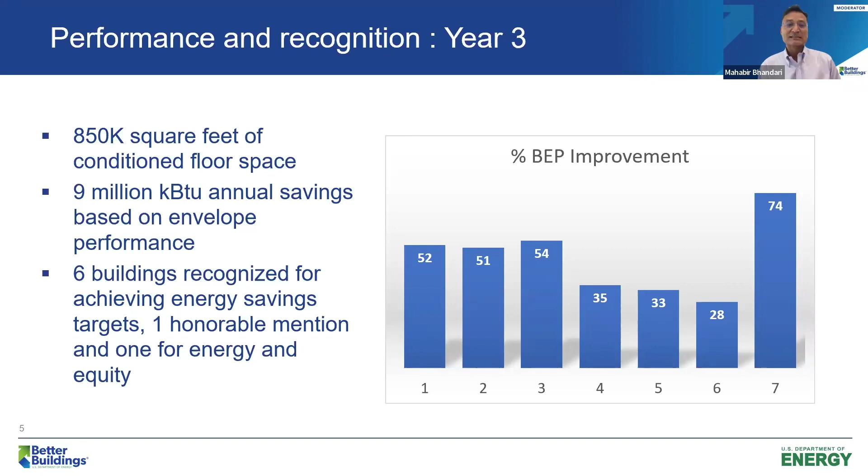So here are our award winners today. If you look at the building envelope performance, what we call BEP - and some of you, if you haven't heard about BEP, we had already a few presentations on how we were calculating it - these are our different improvements from baseline to different categories. The first one, for example, retro honorable, were very close to 30% savings. We had award categories: in retrofit buildings, 30% savings gets you a retro honorable. They were novel 40, and we have all the way up to novel 50. One of the buildings was 70% more improvement than the base - it's a new building, so at the base code at that time.

So we'll show now some of the awardees. Please enjoy the videos and slideshow.

Hello, my name is Anas Al-Qassas, founder and CEO of Inovues. I'm here to present Creekside 5, a non-invasive facade retrofit project we did recently in Portland, Oregon, where we transformed the first floor double-glazed windows into high-performing triple-glazed without removal or replacement. First, I'd like to thank the DOE Building Envelope Campaign and Oak Ridge National Laboratory team for the recognition. This project was a demonstration of our patented insulating glass retrofit technology and exterior secondary windows, done in collaboration with Capital Land and the Northwest Energy Efficiency Alliance (NEEA), who sponsored a full measurement and verification study as part of their field test program for commercial secondary windows.

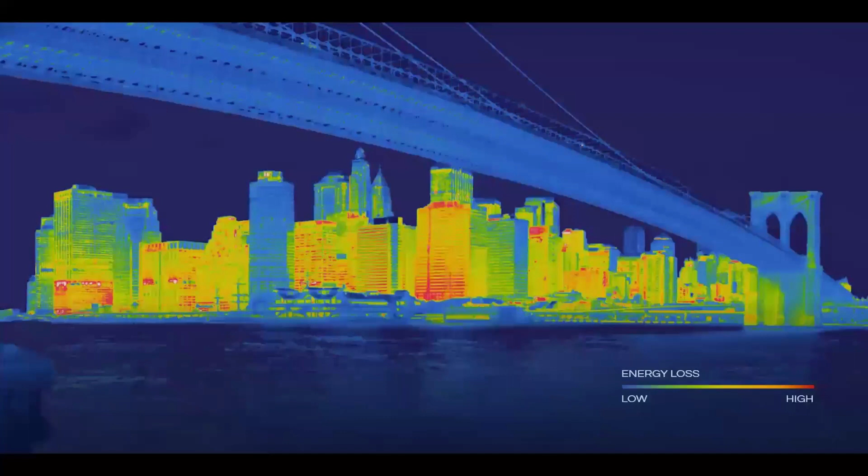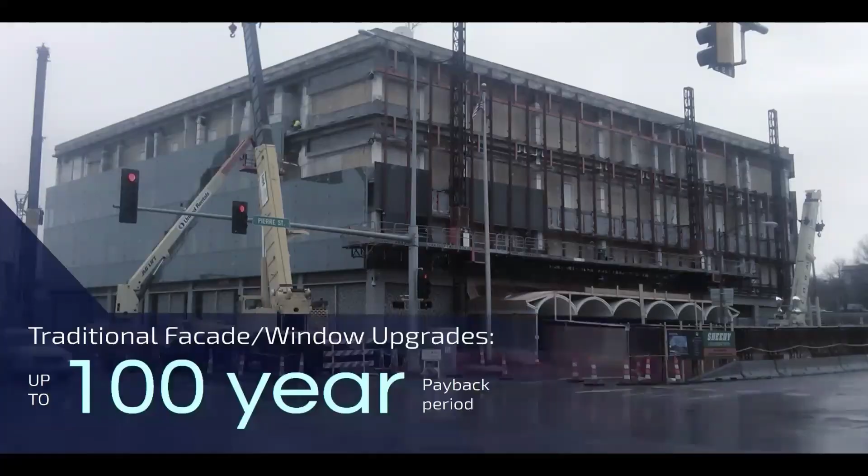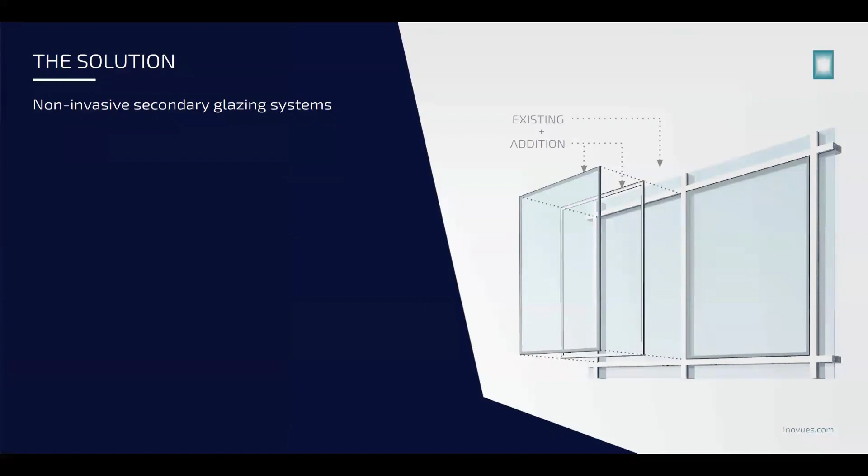Creekside 5 is not a unique building. About 70% of all buildings in the US have energy inefficient facades with obsolete single and double glazed windows that are responsible for up to 40% of buildings' energy loss. The problem is reglazing building facades and replacing windows is cost prohibitive for most building owners, as it requires a capital investment with an unrealistic payback period. To solve this problem, we've developed non-invasive, lightweight secondary glazing systems that provide similar benefits to window replacement, but at a fraction of the cost due to the significant reduction in resources needed to fabricate and install these systems. The result is up to 10 times faster payback and higher ROI.

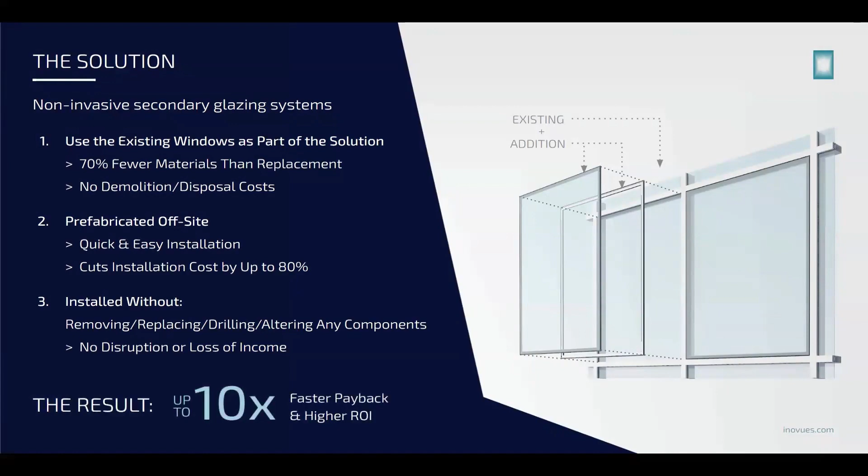Here I'll show you two examples of secondary glazing systems. On the left, this system attaches directly to the existing glass, and when installed, it creates a tightly sealed, desiccated thermal cavity like in a factory-made IGU. On the right is a breathable secondary window system that can attach to the existing glass or to the window frame from the interior.

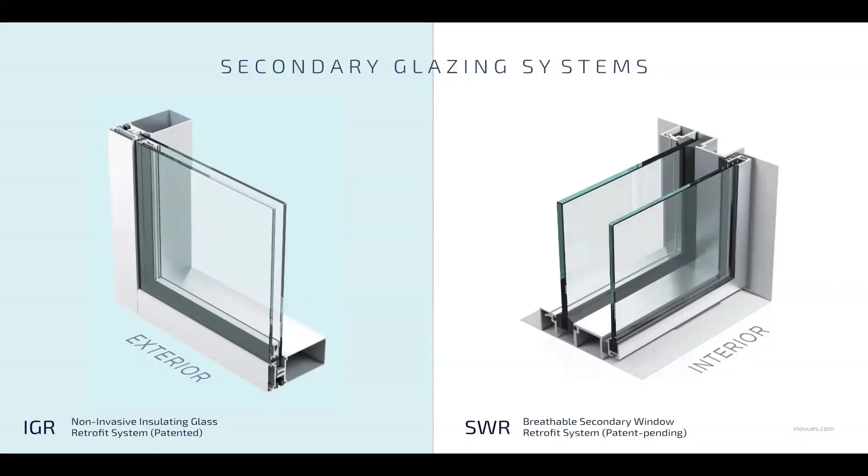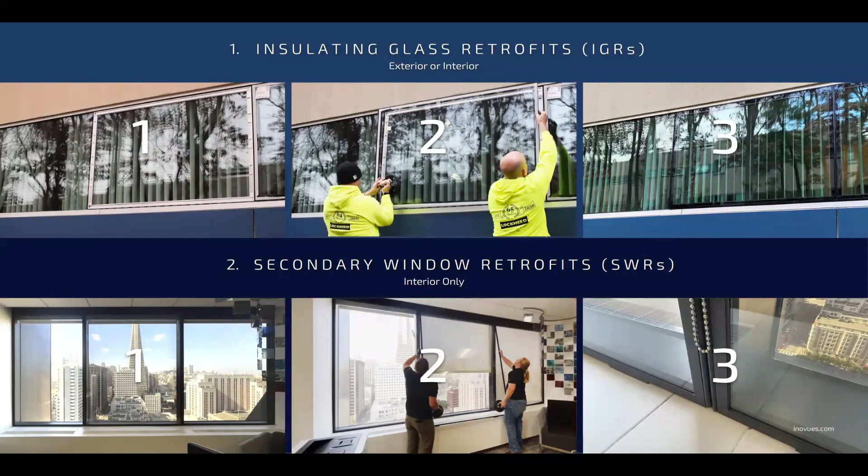Here are some photos showing those two secondary glazing systems and how they're installed. The top images are for the exterior IGR system, and the bottom images are for the interior SWR system.

Now at Creekside 5, a typical pre-2000 office building with electric heating and cooling, the exterior IGR system was installed over the existing non-low-E coated double-glazed window walls on the first floor. The IGRs transformed 114 5-foot by 6-foot panels into low-E coated triple-glazed windows.

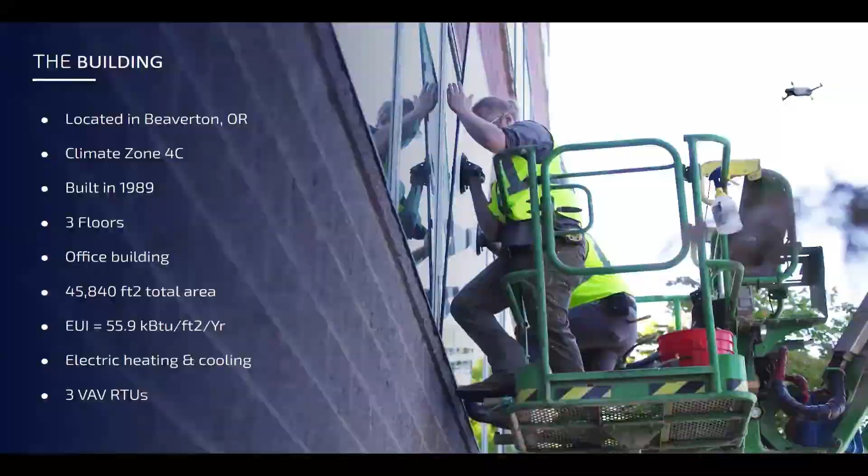The installation was done in about two weeks without disrupting normal building operations and occupants, as you can see here, so people continued to work normally.

At the beginning of the project, we did a cost-saving analysis using a calibrated energy model and studied the impact of multiple glass options and low-E coatings to identify the best option. In addition to performance and cost, preserving the look of the building was an important aspect that played into the selection of the glass used with the IGRs.

After the retrofit, the independent one-year M&V study by Energy 350 showed that the secondary windows have met or surpassed the estimated 8% total energy savings and 10% heating and cooling energy savings.

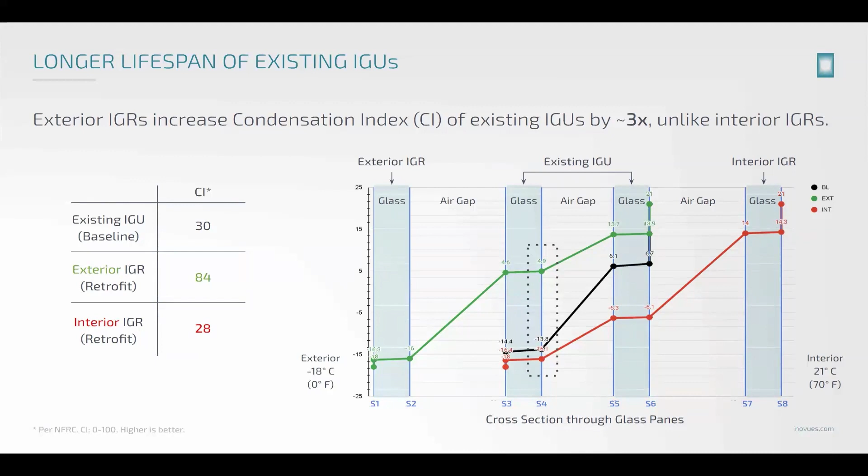It's also worth noting that exterior IGRs increase the condensation index of existing IGUs. In this case, for Creekside, this means it extends the lifespan of the 30-year-old double-pane insulating glass units. This was validated this past winter when over 20% of the IGUs on the second and third floor, which were not retrofitted, started showing internal fogging and condensation and had to be replaced, while none of the IGUs behind the secondary glazing on the first floor had that problem.

Lastly, I'd like to highlight the significant impact of secondary windows on buildings' sustainability and decarbonization. For example, at Creekside 5, the 3,200 square feet of exterior secondary glazing installed on the first floor are expected to reduce this building's CO2 emissions by over 600 tons by 2050. This is equivalent to the emissions from burning nearly 700,000 pounds of coal.

And keep in mind, this retrofit is starting with double pane baseline windows, and it's for one floor in a small building in a relatively mild climate. So imagine what the impact would be if we upgrade the single glazed buildings that represent about 40% of the existing building stock.

Even more, imagine what the impact would be if we integrate some of the more advanced glass technologies with secondary glazing systems. As a cost-effective, low-carbon energy conservation measure, secondary windows can unlock the path to decarbonization in existing buildings and accelerate the transformation into a sustainable future.

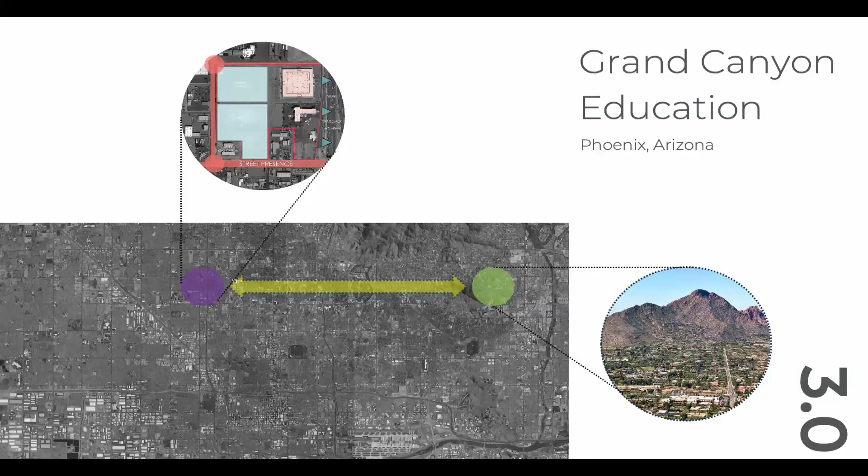So the design of the building is based on the basic principles of passive solar design. The siting of the building is based on optimum solar orientation, which for us is the first line of defense for good environmental design. Capitalizing on daylight opportunities for every space within the building and blurring the boundaries between indoors and the outdoors was the next critical thing in the design process.

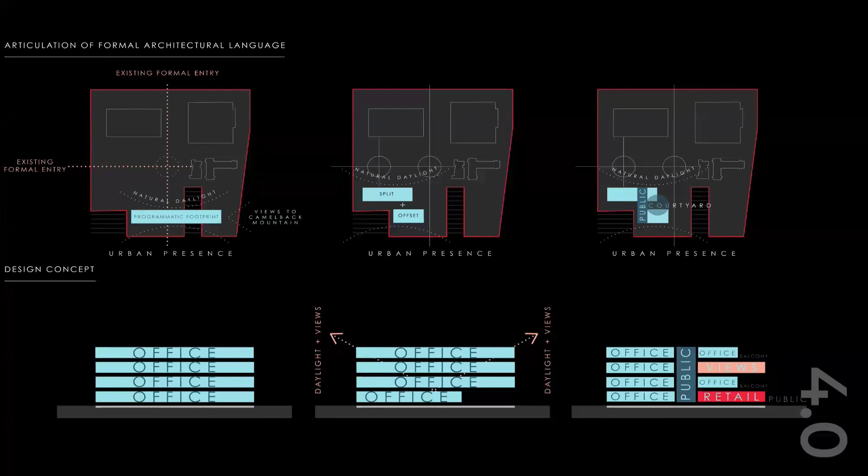The juxtaposition of the building blocks is carefully orchestrated to create these outdoor shaded courtyard spaces that provide outdoor learning or outdoor lunch and informal workspaces throughout the year.

So our best opportunities for designing an energy efficient office building in a hot and dry climate is the reduction of daytime cooling and lighting loads. This was accomplished with optimizing the building geometry and right sizing the building envelope.

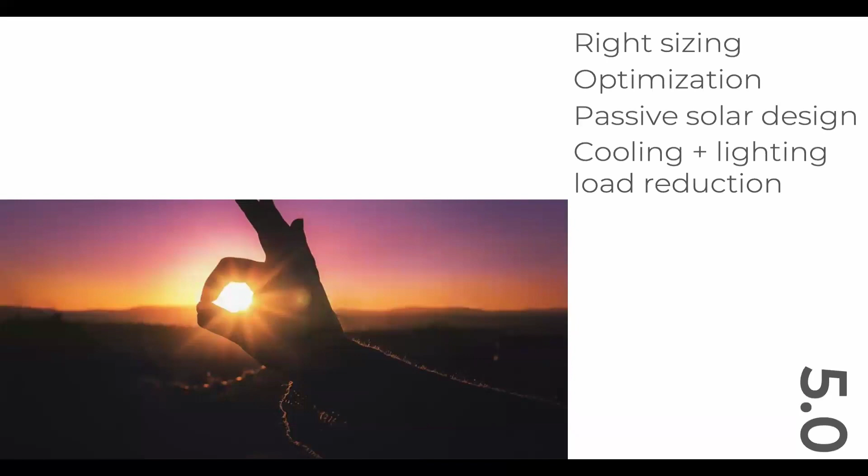We did a great deal of detailed analysis with the optimization of window to wall ratio and then the depth of the floor plate, to ensure that the distribution of daylight was even and reached pretty much all usable workspaces.

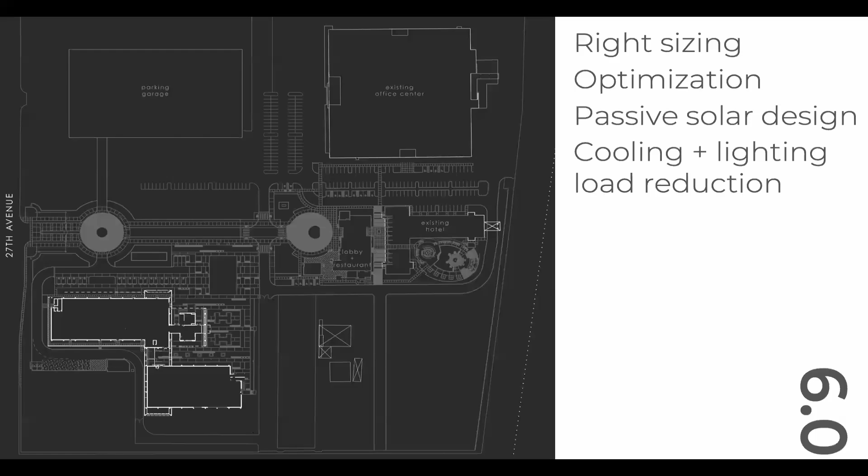So the building is built as a post-tension concrete structure with locally made masonry blocks on the first level, and steel studs with an EIFS skin on the upper levels.

We ensured that our specs included fly ash as an integral component of the concrete in a way to keep the embodied energy low. The concrete structure was integrated as an important part of the design to allow for flexibility in organizing the interior spaces now and in the future.

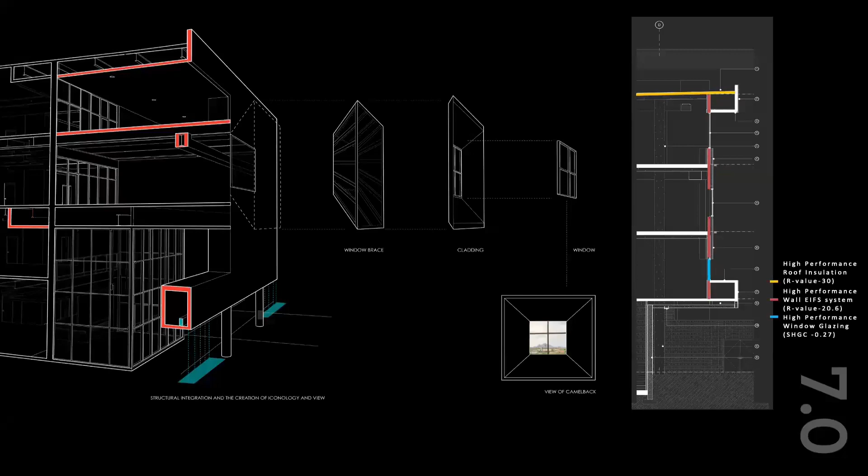The exterior building skin is an R20 building envelope for the walls and R30 for the roof. The glazing in the window system is really a balance between visible light transmittance values and solar heat gain coefficient for the glazing system.

We paid careful attention to thermally broken connections between different building materials, primarily masonry, steel, concrete, aluminum, and glass, as these building materials react differently and move differently with exposure to heat.

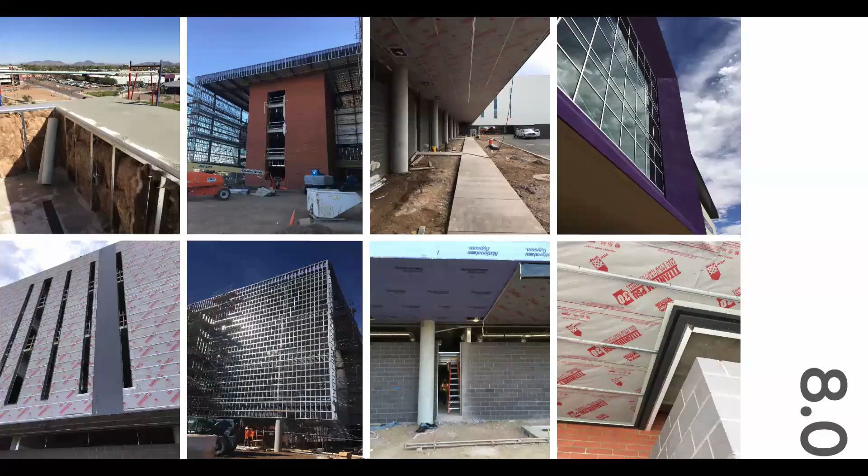The building also has a cool roof system that inherently further reduces the building's cooling load. Through a series of energy modeling exercises, we were able to design the electrical lighting loads to be about 0.4 watts per square foot.

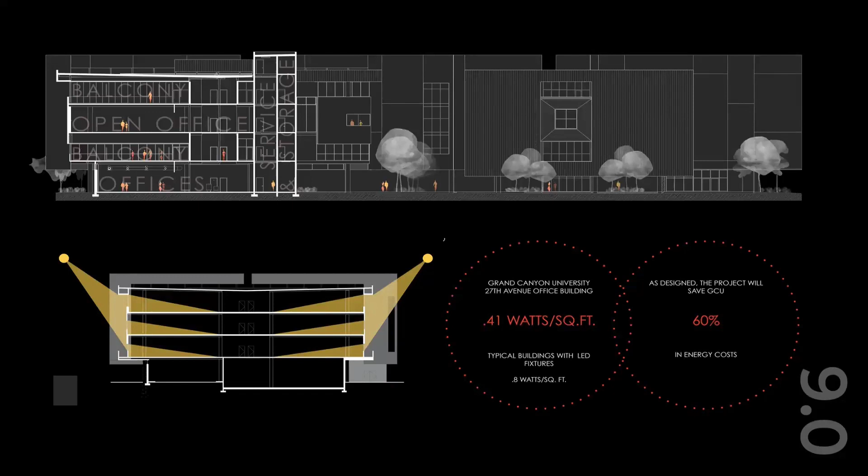As an overall building design, we were able to reduce 60% of the energy loads, and that's primarily due to a tight and well-insulated building envelope.

So the resultant building, as you see, has undoubtedly transformed the neighborhood and is a testament to the adage: good design solves, great design transforms.

This project has also received honors from our local NAIOP, which is a Commercial Real Estate Development Association, Engineering News Record, and several others. But we really appreciate the recognition from Oak Ridge National Laboratory.

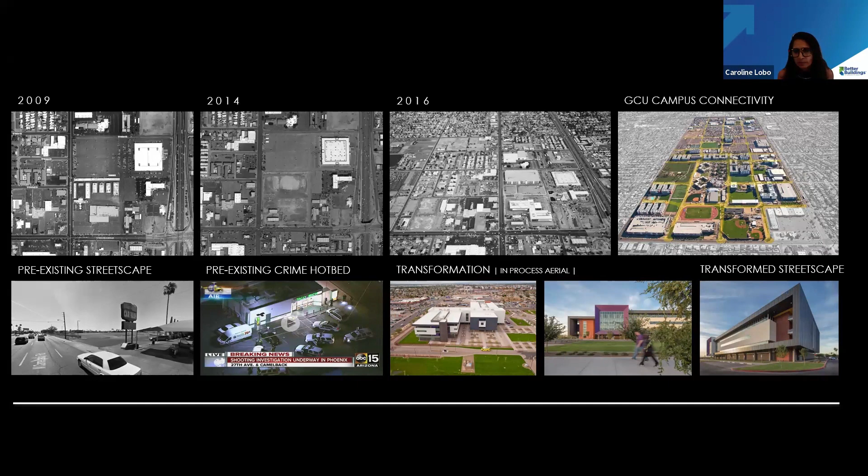I talked through this in the video, but really for us it was right-sizing the building, making sure we are optimizing all the spaces for this open office floor plan, and then reduction of lighting and cooling loads.

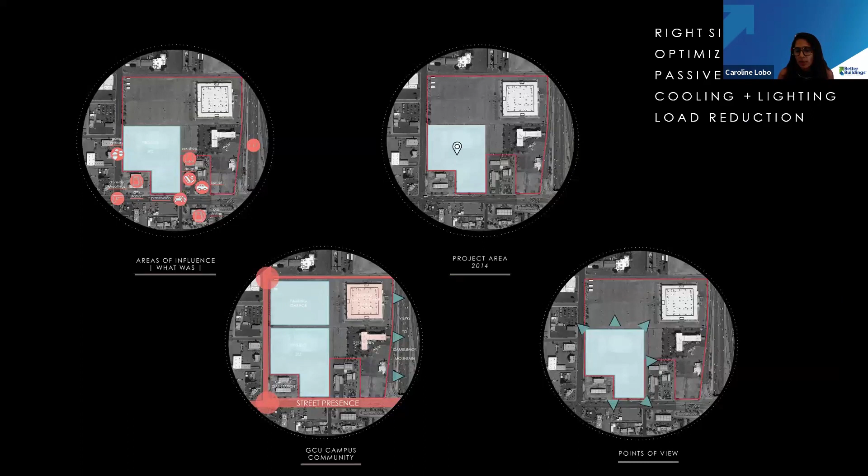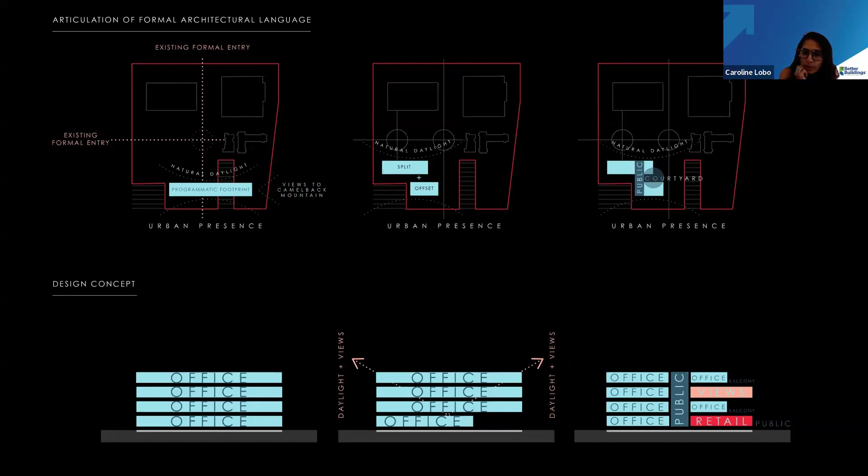So trying to figure out what is the optimum shape, how can we come up with areas that can be an indoor-outdoor spatial experience, where we can provide outdoor areas that can be used as outdoor office working spaces or cafe areas within the building, and really capitalize on getting a lot of the daylight, which we have in abundance in the Phoenix area. We wanted to make sure that this building really reciprocates to the surrounding climate, as well as the surrounding neighborhood, and creates these view corridors to the beautiful mountains in and around the 27th Avenue corridor.

So we ended up with a very simple design parti and a very simple building profile.

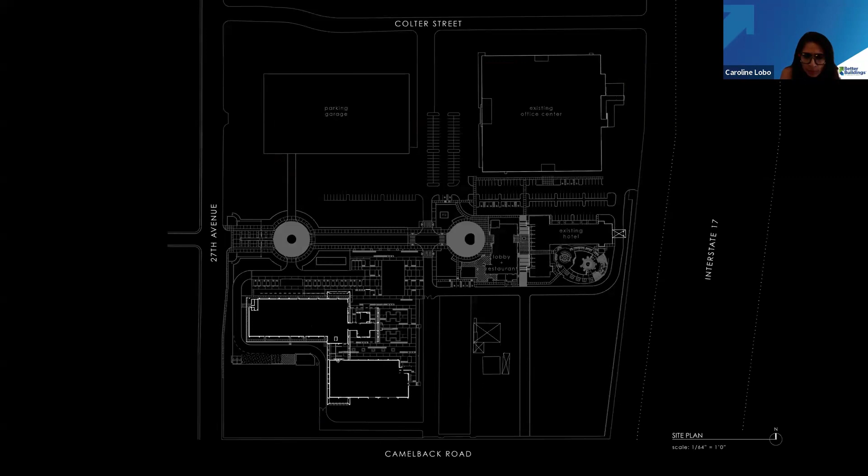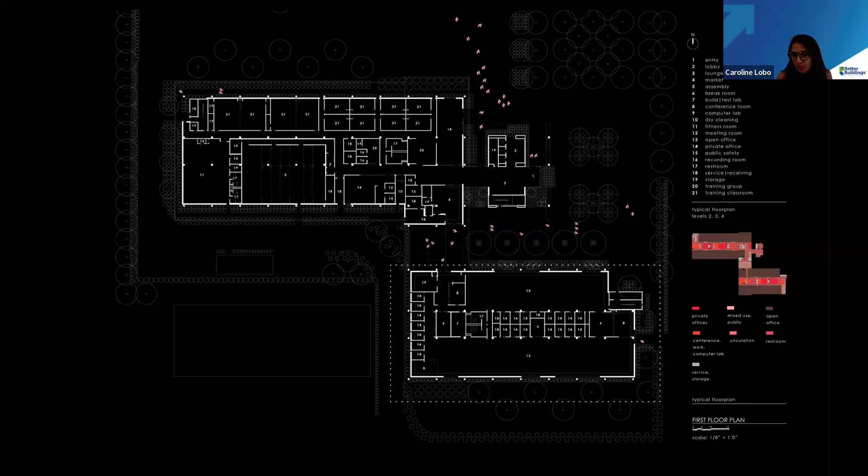Our goal was to make sure that we put all the service areas in the central core, and try to get the footprint or floor plate of the building in a way that maximizes the amount of daylight we can get into the interior of the building. The large open spaces you see are where all these cubicles are laid out, so it's an open office area, and we tried to maximize daylighting within the interior of all of these office spaces.

And then also integration of these balcony spaces, so that people can still step away from their individual work zones and step out into an area where we provided Wi-Fi in the entire building, so people could essentially sit outside in each of these balconies, either to grab a coffee or work in those balcony shaded spaces. If you've been to Phoenix, Arizona in the hot summers, primarily June through August, it's really unbearable heat, but we've had people using these balconies even in those peak summers.

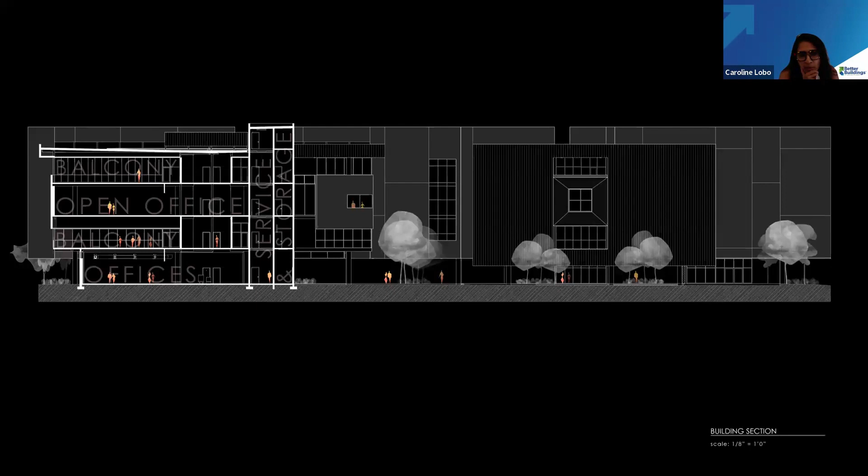So really, again, we try to maximize the floor plate for every floor. It's a 4-story building. And then as a part of our design strategy, we also like to celebrate nature. So what you see in those blue lines is a rainwater collection system, which goes into this kind of a channel.

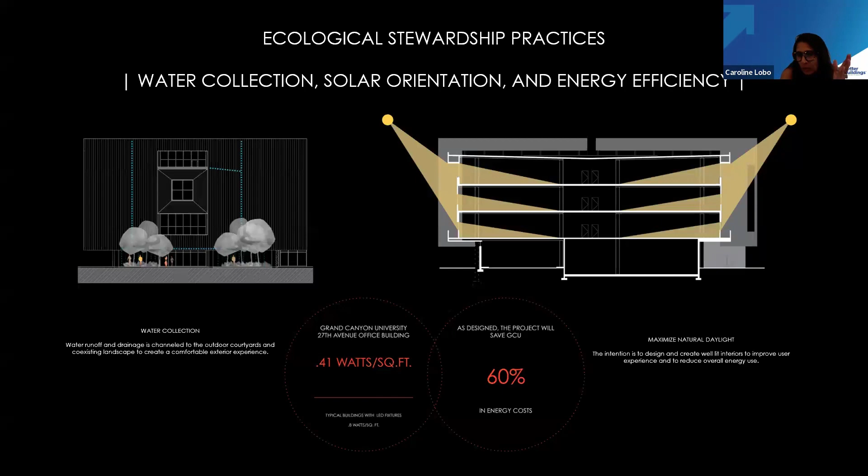And then, whenever it rains, it behaves like a really nice rain screen. And you really see the water trickling down into this landscape trough, which connects to some of the plants and trees around that area. And then we were able to, with just simple design strategies, reduce lighting load to half, and our energy costs overall were between a 50% and 60% reduction.

And then in most of our designs that we do at Soul, we try to express the structure and also use materials that don't need an additional skin, if you will. So exposed concrete columns, and then exposed any elements of the structure that really don't need to be camouflaged with something else. That's been inherently something that we work towards as one of our primary design strategies at the office.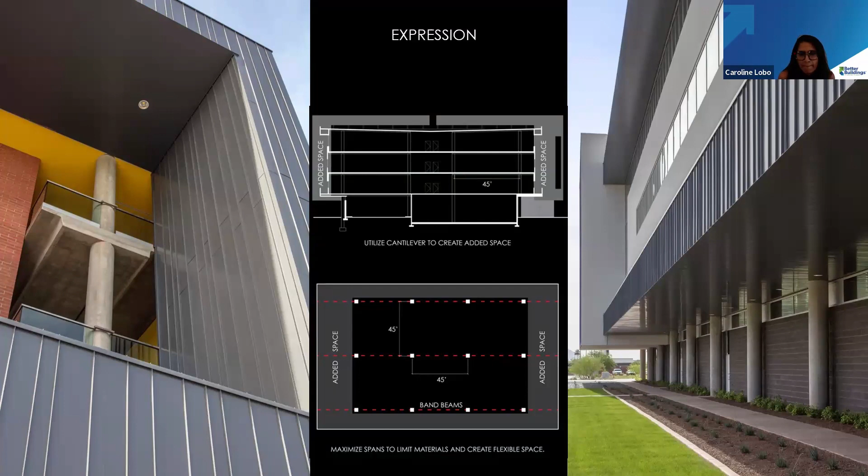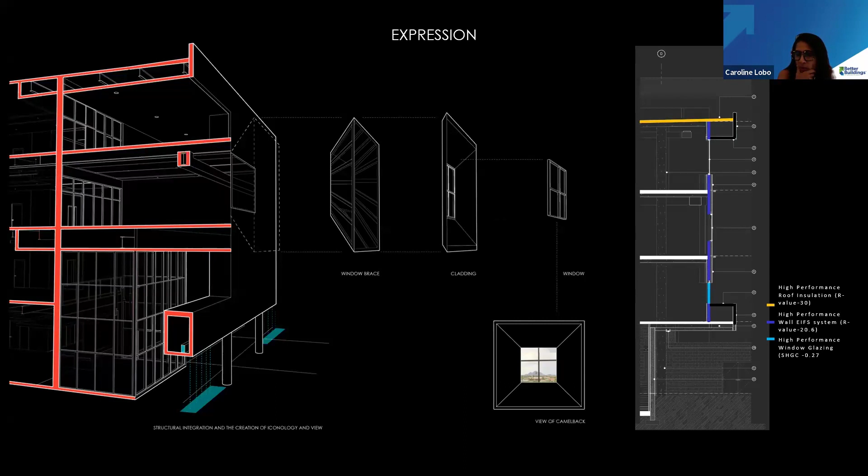And then again, this is just a detail of how we capture rainwater and then take it through the building skin. The blue lines for the diagram to the right show the rain screen that we detailed out as part of the project. And again, the building skin is R20, the roof is R30 with a cool roof coating. Our glazing system is to basically reduce the heat intake into the interior of the building itself. So it's a high performance window glazing system with a heat gain coefficient of 0.27.

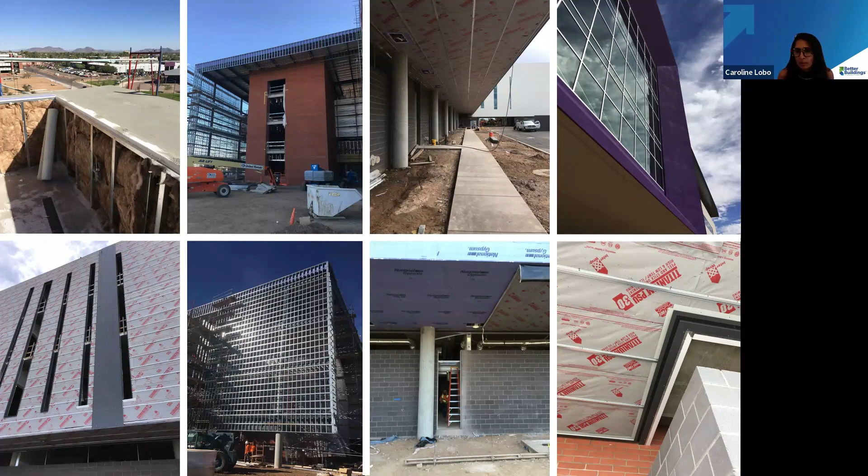So these are some of the construction photographs. We always pay careful attention to when two different materials come together, because in a place like Phoenix, we have to be cognizant of how materials react with the heat. And so, making sure of all those connections and how we start to insulate and make the building breathable at the same time.

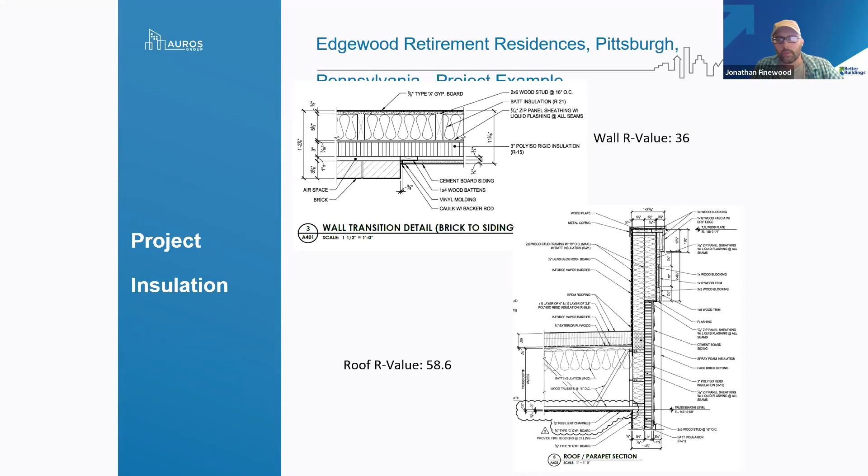This was the wall to floor detail, and I wanted to show that we connected our exterior primary air barrier of ZIP to the Stego vapor barrier underneath the slab. The pre-drywall blower door number was 0.13 air changes per hour. Just last week, I did the final blower door test, and it finished up at 0.46 air changes per hour. Next slide, please.

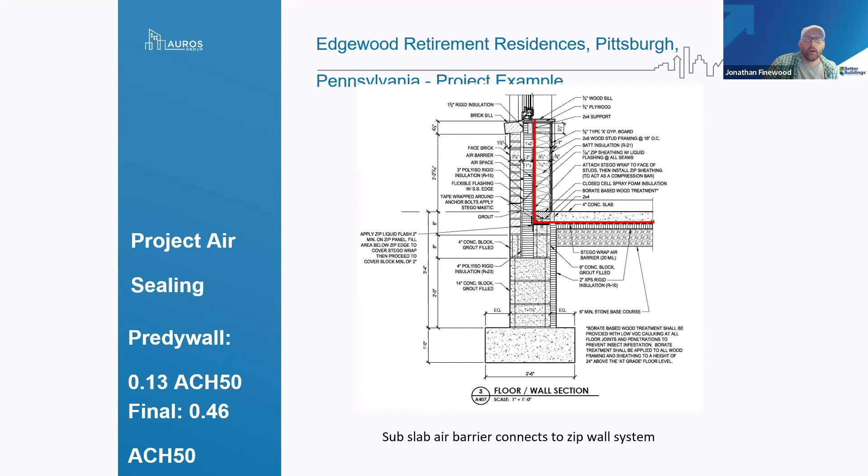These are some of the thermal bridge calculations that we did. You can see that the slab edge had an FRSI of 0.879, and that's going to stop any condensation happening at that point. The overall weighted average of the floor was 1.2. We did have 8 feet of insulation around the perimeter, I just want everybody to know that.

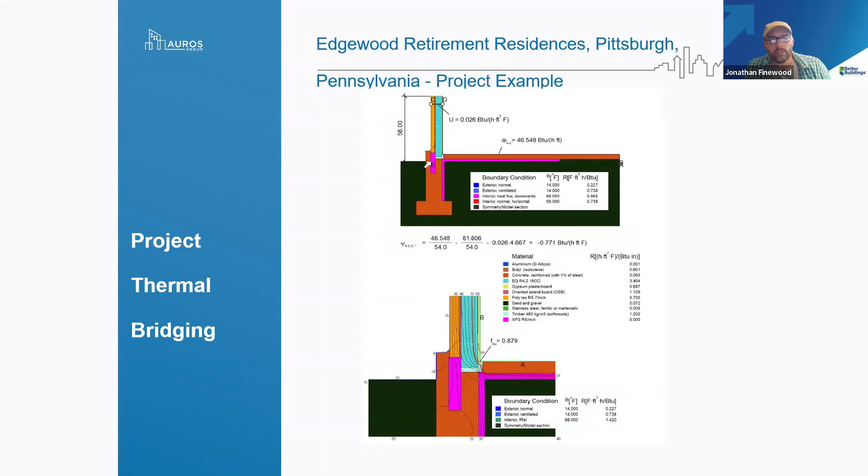Next slide, please. This is the in-unit Ephoca system, where it accomplished heating, cooling, and ventilation all in one system. They're highly efficient, and they were given pre-certification on the Ephoca system pending some tests. Those tests have been completed, and they're now a PHI certified component. Next slide, please.

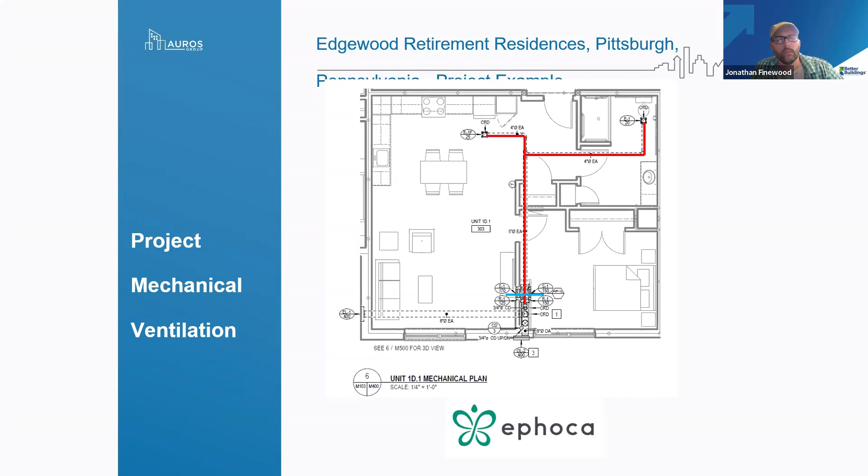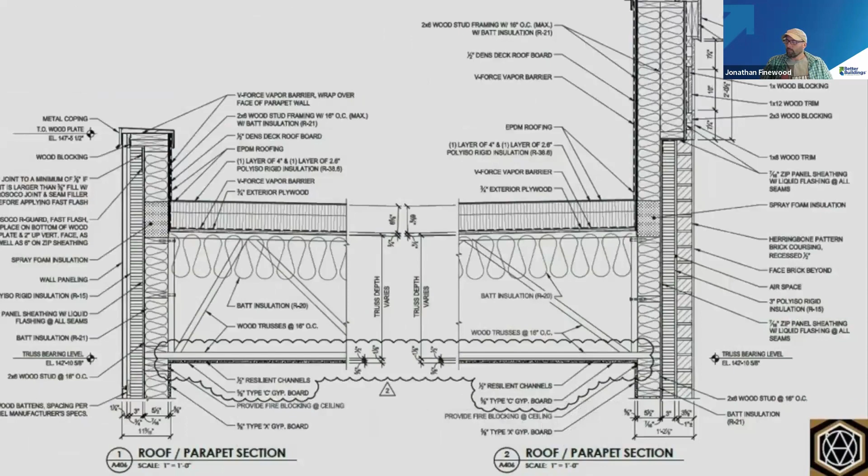When you're talking about best-in-class performance for the nature of what this is, did we miss a caulk joint? Did we miss sealing a receptacle on the outside of the building? Maybe, but the numbers say we hit enough of them. I think the team reacted well, I think everybody worked well together, and I'm happy with the result.

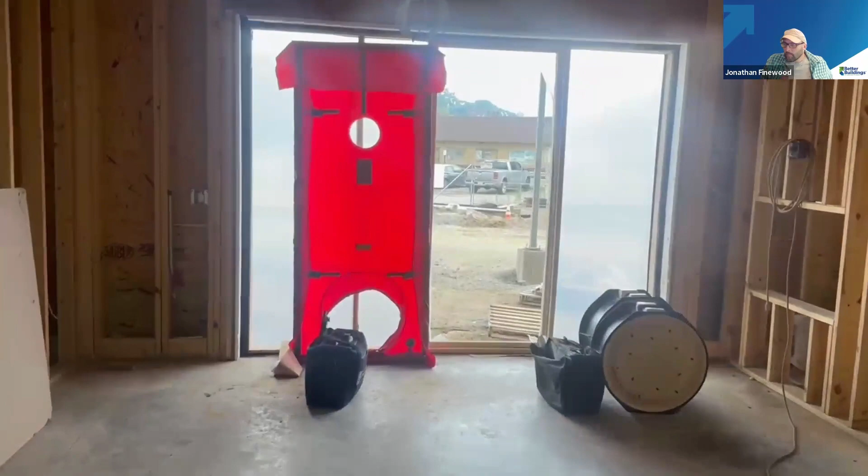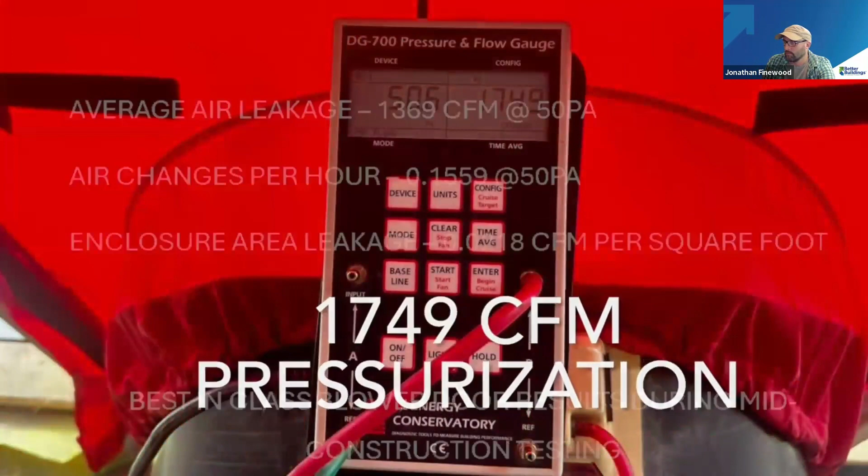Passive House is not a premium, Passive House is a learning curve. And what that means is that if we're able to bring in the right team that has experience on projects like this, then we can achieve these sorts of outcomes on a continued basis, and it's not a random result. You're doing this consistently. So having the right design team involved on the project who has experience in Passive House, having an owner who's been through this a couple times, and certainly finding contractors experienced in Passive House helps. Again, Passive House is a learning curve, and once you get through it, you're certainly not going to see a premium in this type of construction. At least that's been our experience.